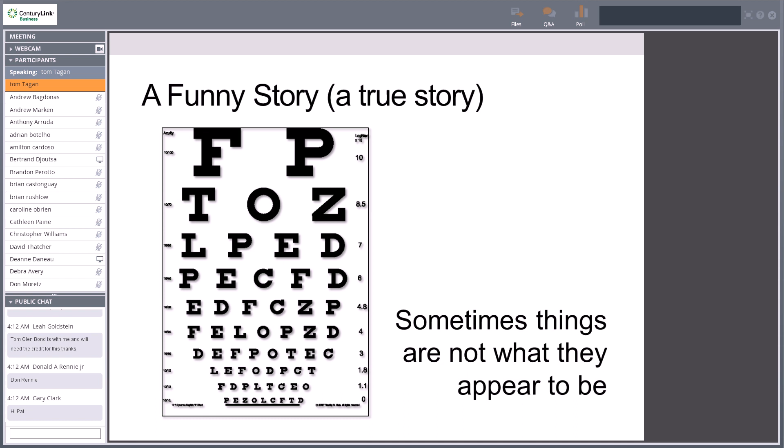Okay, Thomas Therian, absolutely right. And I know where you are, Tom. I know you. Tom's a friend of mine. Excellent, excellent. In fact, I'm not going to say where it is, but Tom is extremely familiar with this.

So, again, we're going to look at things that maybe you're not thinking of, and maybe you'll show me something that I'm not thinking of. It's definitely a group effort, and it's a team effort. Good job, Tom.

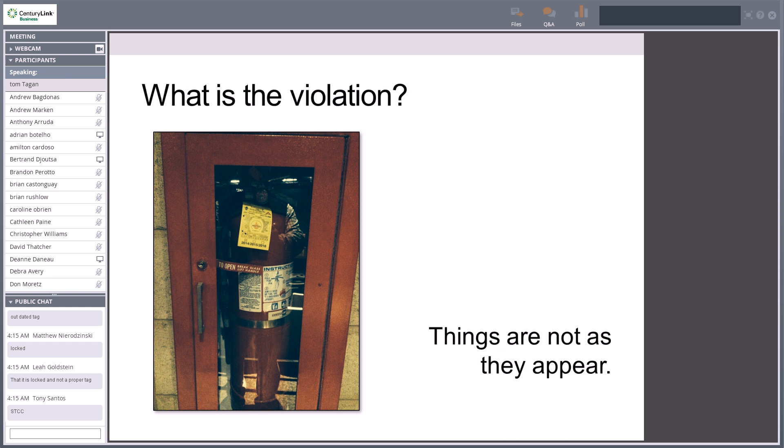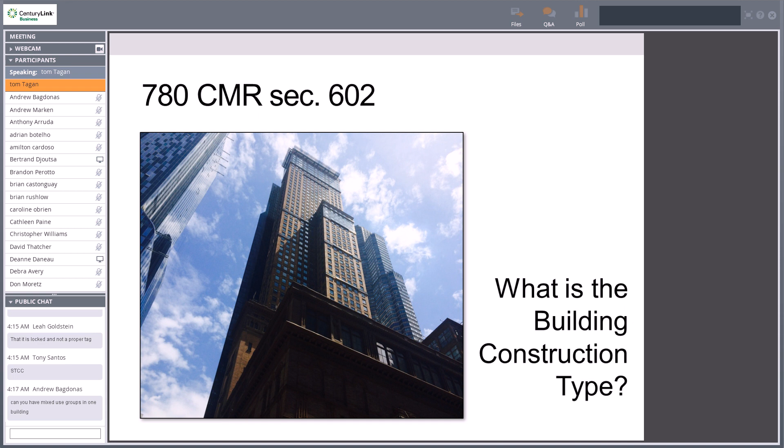Now, on buildings that are already built, I'm not here to reinvent the wheel. We're just going to make sure the exits work. A lot of times, though, I will get a question from the DCAM project managers saying, we want to remove this exit because such and such, and then I refer to Section 1021 and say, look, with the occupant load, with the use group, and the building type, I would need to have this, this, and this in order to actually let you take an exit out.

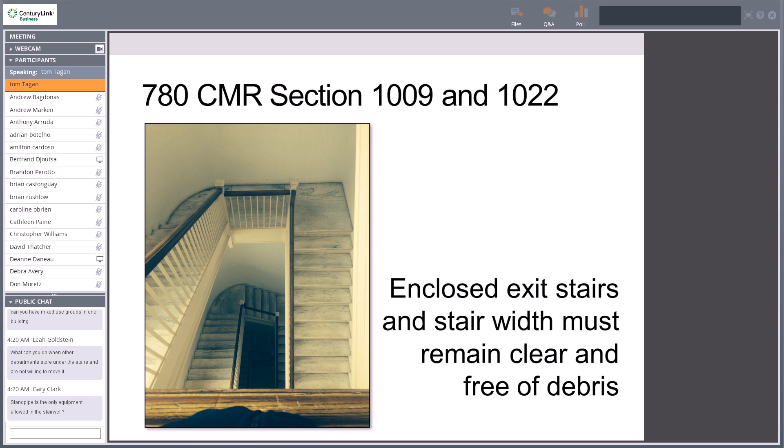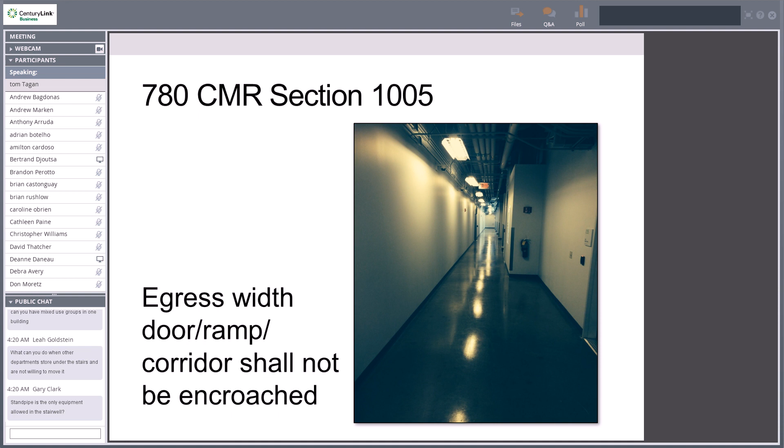I know this is illuminated in kind of a different way, but there's a backlight on the other side, so there's no issue with the illumination here. But we want to make sure they're illuminated properly, and that's one thing I look at. Again, when I'm doing the inspection, I always figure in the back of my head, the place is on fire, my hair's on fire, and there's 20 people in back of me. We can't choose our disasters.

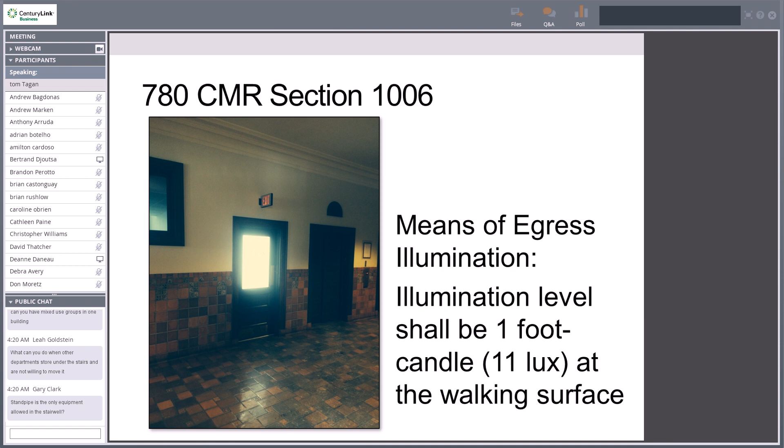So there's a lot of information that I'd like to get into, but with NFPA 110, I'm still going to always look for my emergency generator and standby generator systems. I'm looking for the testing from the company that does the work, and usually it's done either weekly, or the older ones are done by the month, and they're usually a printout. I look for that also.

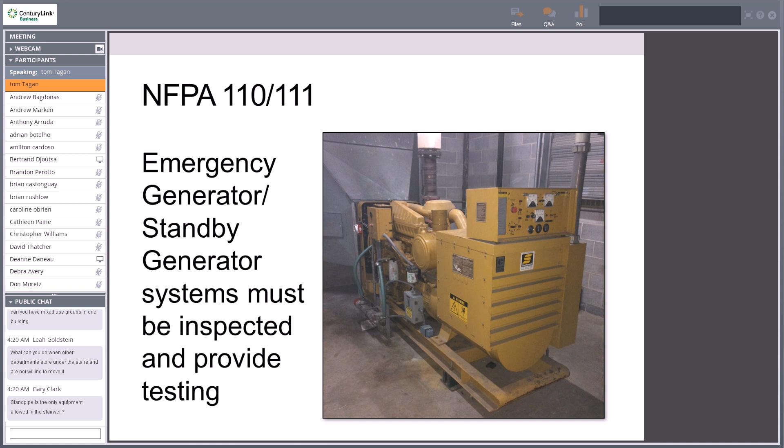Again, we're planning on doing a lot of trainings. I will be doing one on Chapter 7, starting from firewall and ending at smoke partitions and everything in between, and NFPA 80, which is the standard for your fire doors and rated doors.

So whenever I go into a boiler room, I'm always looking, and you guys should do the same thing. When you have work done and you have conduit drilled through a wall and you know it's a 2-hour wall, 1-hour wall, half-hour separation, whatever, make sure that there's a UL-rated assembly number, make sure that the assembly number is being put on, and make sure the rated assembly is actually being performed.

A lot of times we don't require a permit for minor electrical work, so you're our eyes and ears out there. The problem is when I do an annual inspection, I'll see that, I'll write it up, and we'll need to get that taken care of. But all of this stuff is there for a reason. And I'll tell you, I did a hospital, and this right here was in the building part of it. There was a 2-hour wall, and there were 3 areas that had holes put in after the building was built.

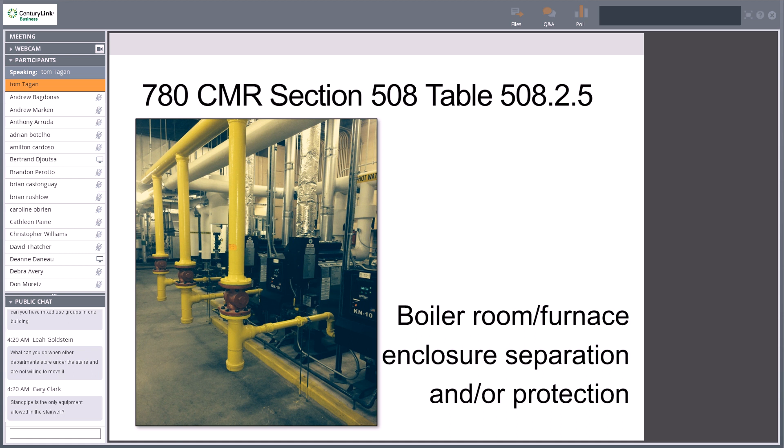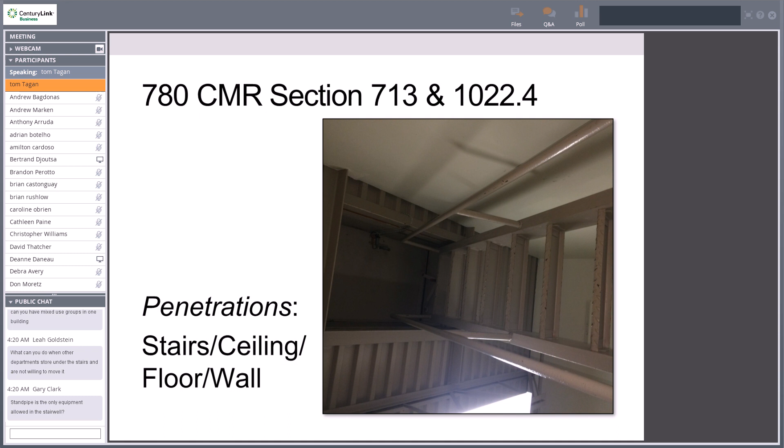Now, I'll tell you a story. We were doing a hospital in the central part of the state, and I was with the facilities director, and they had a bunch of beds all lined up. I said, I can't have these here. Every time I go over there. Finally I just put my foot down. I said, get rid of these things right now. So I went to lunch. I said, I'll give you till after lunch. So the facilities director comes over. He's all confused. He says, hey, I'm not trying to be a jerk, but I'm having pushback from the hospital. I said, oh, really? He says, yeah, the hospital guy told me to tell you. I think he thought I was from the city, not the state, that's why he talked this way.

He says, why don't you worry about running the building department, and he'll worry about running the hospital. I said, oh, okay, that's cool. I got a little message for him. He's absolutely right. I don't know that much about hospitals. One thing I know, though, if I don't sign the certificate, he doesn't have a hospital. And they seemed to move that relatively quickly, so that's a good thing.

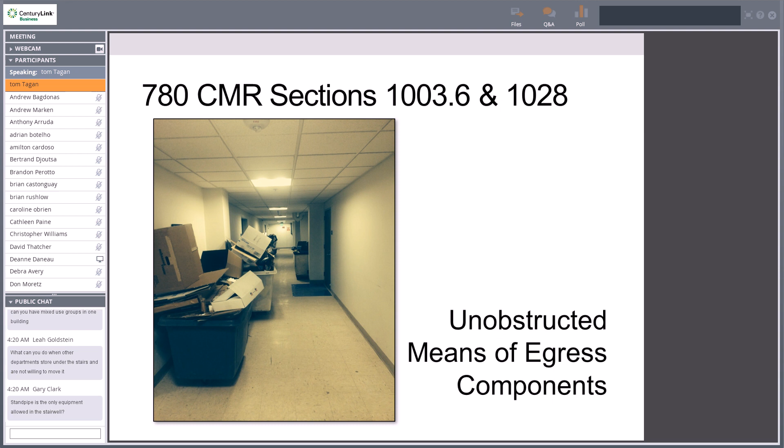We need the Jeopardy music. Yeah, we'll do that. Oh, no.

Marta, that's absolutely right. The first one, Marta put down exit discharge. Do we have another part? Someone listen to Marta.

No, these right here are ancillary, but I'm talking about the major components. Sign, door, and push bar - very good answers, direction's a good answer also, but nope. We need 2 more.

Door opening to the exit. There we go, Marta, excellent again. Exit, and then, nope, not the size - good answer though. Exit illumination is definitely, that's an accessory, but it's not a part. Three major components.

And the hallway is close. Dinah. Okay, I'll give it to you. Marta got the last two, I'm sorry.

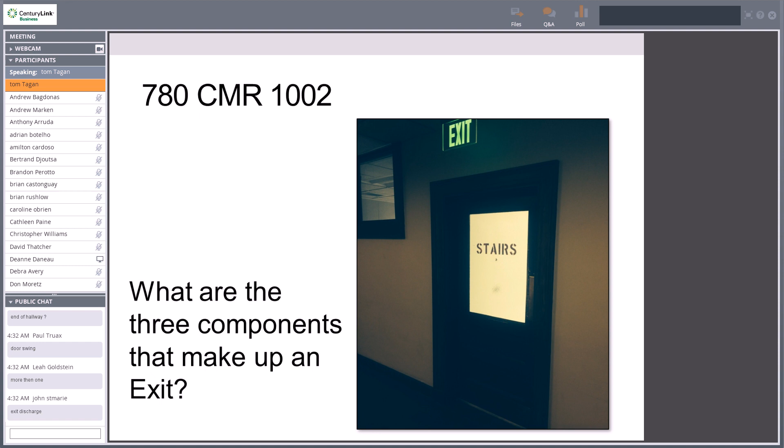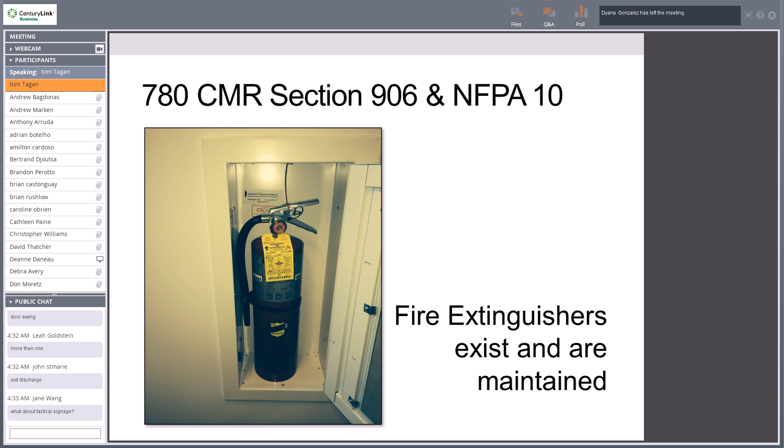Whenever you see a C, that's for anything with current, for electrical fires. A lot of fire extinguishers you'll see are A, B, C. And the K is for the kitchen. That's it. How's that for an answer? Excellent, thank you.

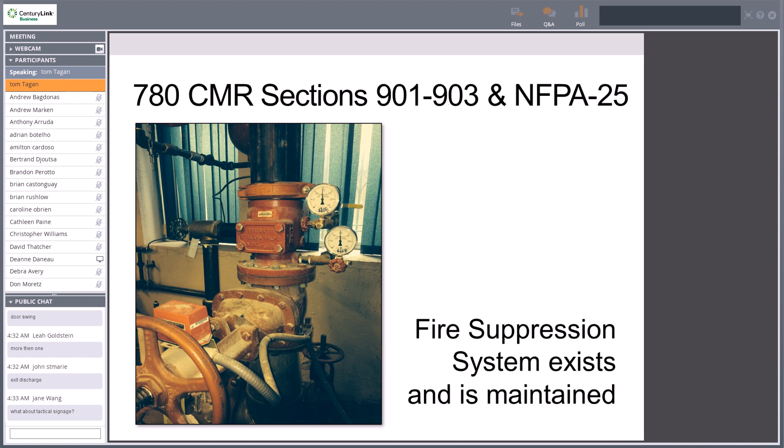780 CMR, again a 9. Remember, 9 is always fire suppression, alarms, and all that. NFPA 25 is anything having to do with water-based suppression systems.

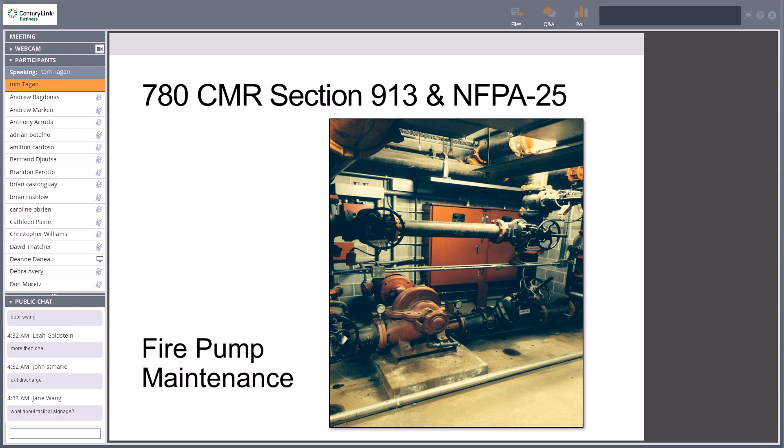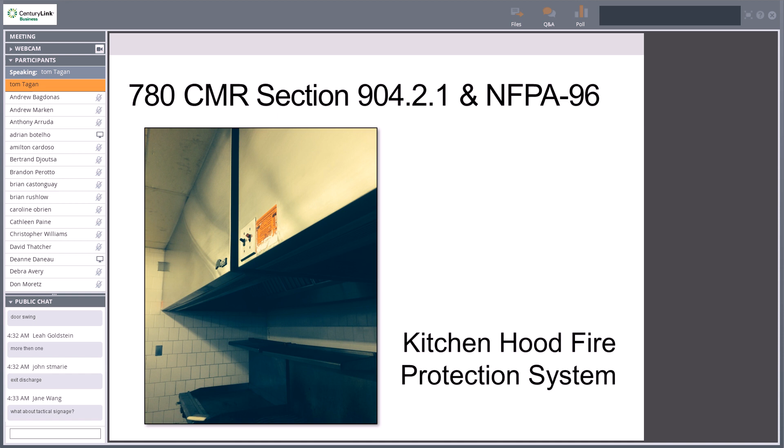780 CMR, 907 through 908. Again we're looking at the 9s. I know I'm repeating myself, but I figure you'll figure out that I'm trying to show you how the building code's set up. 9 is all the suppression systems, all the alarm systems, and NFPA 72.

NFPA 72 is an extremely informative standard. That covers all of your alarm systems, your electrical alarm systems. All the 7s in NFPA have to do with electrical. NFPA 70 is the NEC, the National Electrical Code.

Smoke, heat, horn, strobes present and maintained, report of testing is required. This is the first thing I ask when I go in, whoever's had the joy of having me as their inspector. I say, I want to see your NFPA 72 and your NFPA 25 inspection forms.

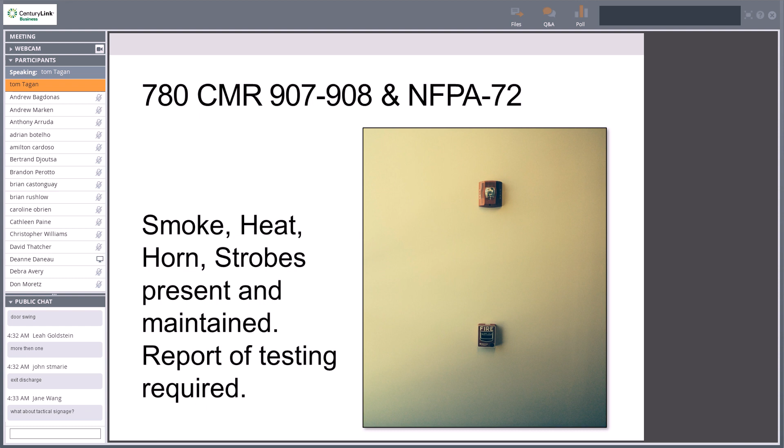Again, 9. Just remember, Chapter 9 is the suppression and alarm systems and all that. 780 CMR.

916, this right here is the MA amendments and NFPA 720. Notice they just added a 0 to 72. This is still a detection system. This 720 is part of 72, it's referred on to 720, and that's carbon monoxide detection maintained.

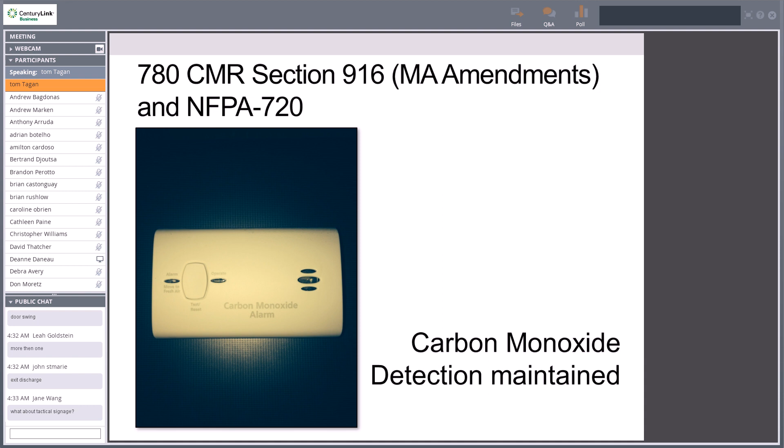Whenever you have anyone who goes to sleep, lives there, or any residential area or anything like that, we need to have carbon monoxide alarm systems.

780 CMR 7 - remember, this covers all the rated assemblies. 780 CMR 716.2, 716.3, 716.4, and table 716.3.2.1.

Fire and smoke dampers must be maintained, accessible, and identified. One of the larger issues I have - I put quite a few of these accessible panels in. You'll also be working with the state sheet metal inspector for these. It's kind of a joint jurisdictional thing we do here.

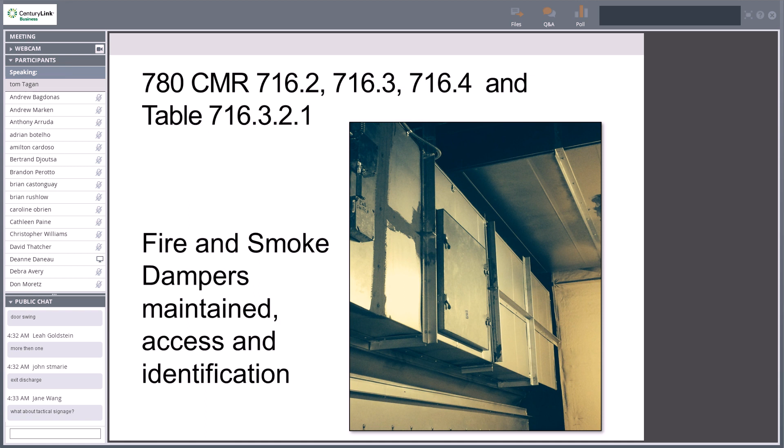780 CMR 9 - detection systems, and NFPA 72, alarms. Manual pull stations must be present and maintained. A report of testing is required. Your alarm system inspector, or maintenance contractor, should be giving you a report on all of this.

Can I ask another question? So in some hospitals they don't have the manual pull stations because they don't want patients pulling them - sometimes they have a key system instead. Is there something you look for when they have something like that?

In 780 CMR 907 and NFPA 72, we do have exemptions for these. If they're present, that's why I say 'if they're present' - they must be maintained and required to test. On some issues, some occupancies - and that's why we need to know what the use group is and what the building type is - some occupancies, I1, I2, A3, do have exemptions for having the manual pull station, because sometimes it's more of a hindrance than it is a life safety piece of equipment. Thank you. No problem.

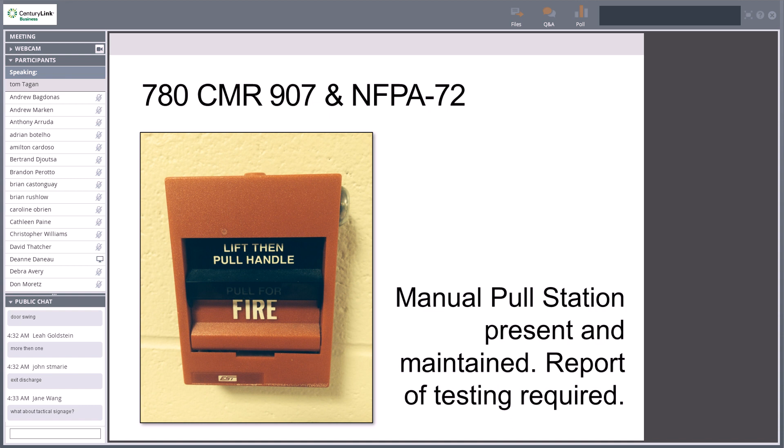780 CMR, again, 10 - what was 10 again? That's a question, what is 10 denoting? I've said it 10, 20 times already. What is the 10? You can use your egress - that's all I see is egress. Excellent job, I know you guys are listening.

Gals are listening. All right, 780 CMR 1012 and 1013. Handrails and guards must be maintained. You know how many times I walk onto a set of stairs and the first thing I do is grab on? I know I'm a little pixie, I don't take a lot of weight, but I pull on them for a reason. I'm going up staircases and through various places that have to be protected - I'm pushing on them and this, that, and the other thing. The reason being, I want to make sure those are not going to fall off or be out of compliance.

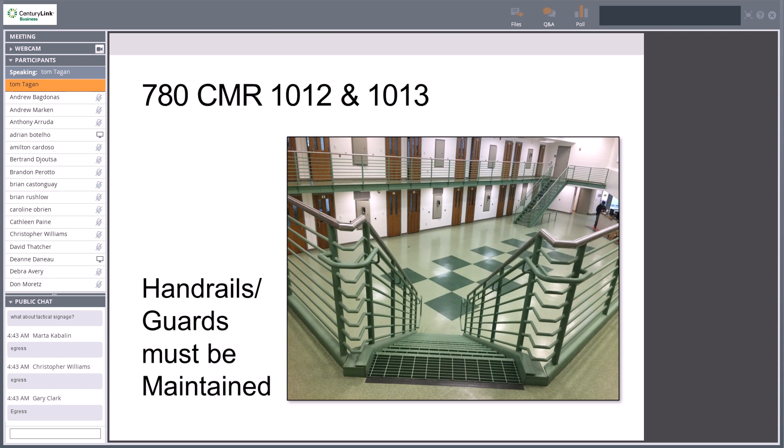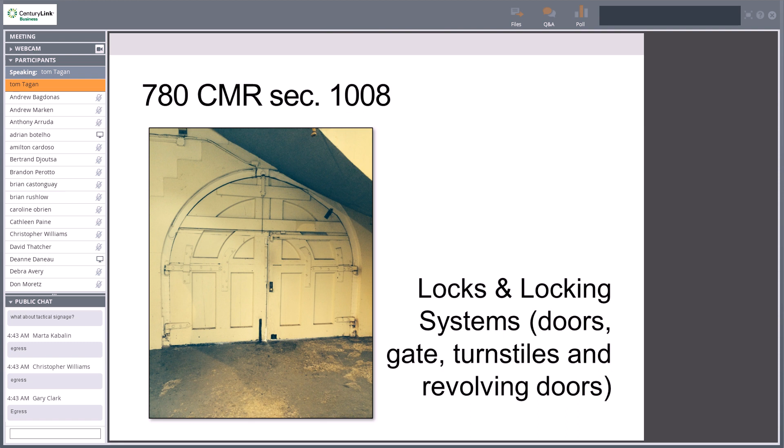Excellent job with the egress, thank you very much, I'm glad you guys are listening. 780 CMR, again 10 - locks and locking systems, doors, gates, turnstiles, and revolving doors all have to be maintained. This right here is a very unique door, at STCC campus - this is actually the museum run by the National Park Service. Sorry about the picture, it's sideways, that's the way it goes.

780 CMR, section 10 again - 1008.1.10, panic hardware, fire exit hardware, use group A and E. Now when we get into NFPA 80, which we're going to have a seminar on, you're going to find out that not all panic hardware is born equal - there's certain stuff for certain doors.

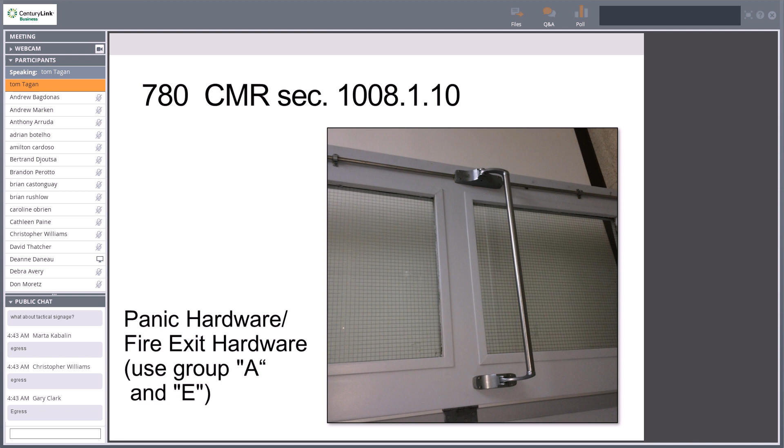This building - the question was from Tom Therrien, who's right down the street, so Tom, you can go look at it and let him know. All I got to say is we talked to Harold, and he said we don't need one because it's a historically significant building - you can see a light up here, but the exit would take away from the historic value of the building. It's very rare we ever grant this, I'm just messing with you Tom, but under chapter 11 of the International Existing Building Code, we do have different means for exit discharge in a historic building. So there are a couple exemptions here - it is what it is. Good job, Tom, thanks for giving me a hard time.

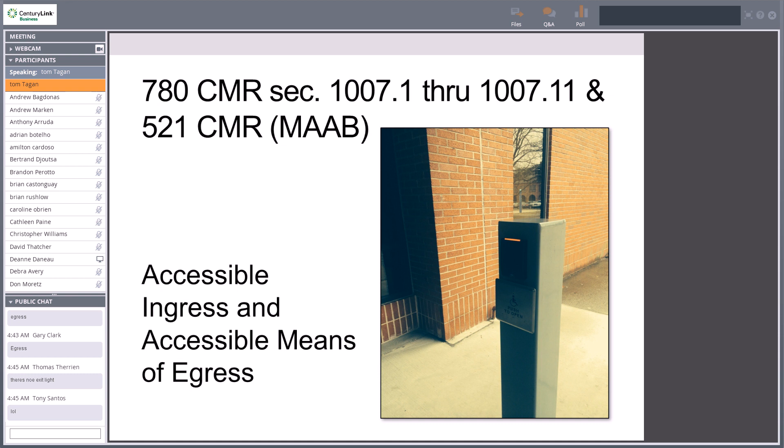780 CMR, 1001.3.3, Mass amendments. Exterior stair fire escapes every 5 years. Fire escapes and egress balconies shall be examined and/or tested and certified for structural adequacy and safety every 5 years by a Massachusetts registered professional engineer. If you keep on reading, they give you a couple exceptions of who could be looking at that, but I like seeing a Massachusetts registered engineer. It will say, pretty much, a person who is competent in the building and maintaining of fire egress, balconies, and fire escapes. I have not found that person yet.

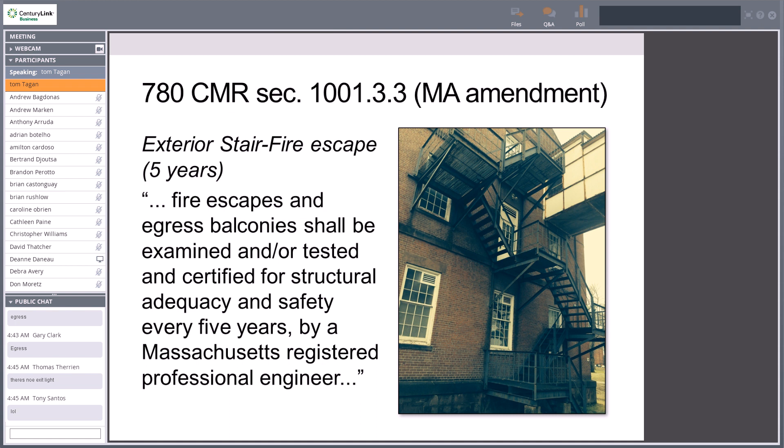780 CMR, Chapter 4. Now, 780 CMR Chapter 4 is kind of an odd chapter. Chapter 4 is funky people doing funky things. That's the easiest way to put it. It's paint booths. It's aircraft towers. It's anything that wouldn't fit anywhere else. It's covered mall buildings, anchor stores, and all that. And it's stages and proscenium curtains. Anything they couldn't put anywhere else, they threw in Chapter 4.

So Section 410.3.5, proscenium curtains, stages, and platforms. The stage opening shall be provided with a fire curtain complying with NFPA 80. Now, whenever we talk about NFPA 80, just think of all of your rated doors, rated openings, and we're going to have a class on that. NFPA 80 goes hand in hand with Chapter 7, which is rated assemblies, and/or an approved water curtain complying with 780 CMR Section 9.

Now, you're going to see 780 Section 9. The water curtain is actually part of the sprinkler system, which brings you to Chapter 9, which is all your suppression and all that stuff. There will also be an alarm component there that will go to the rest of the suppression system and the alarm initiating devices.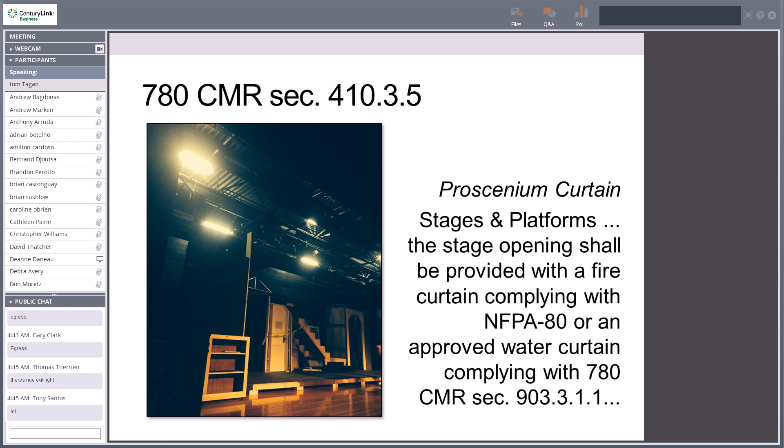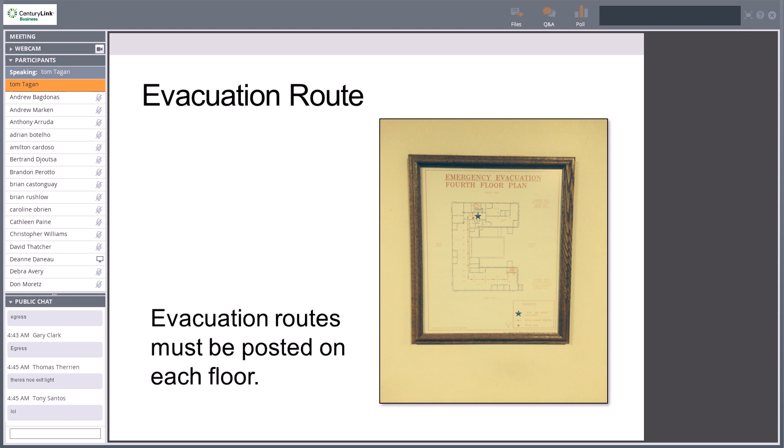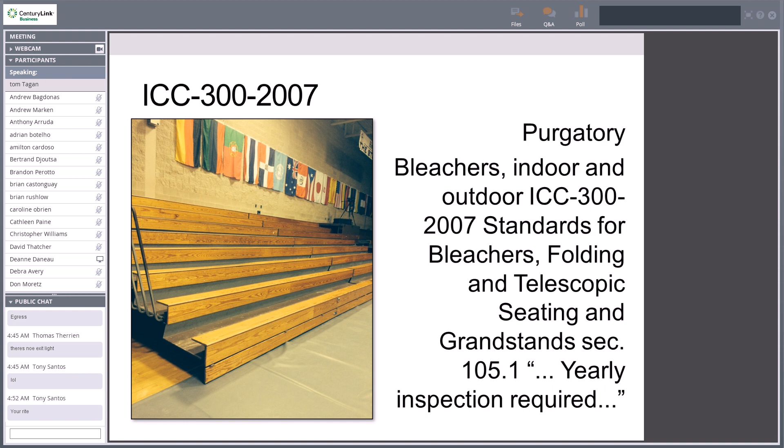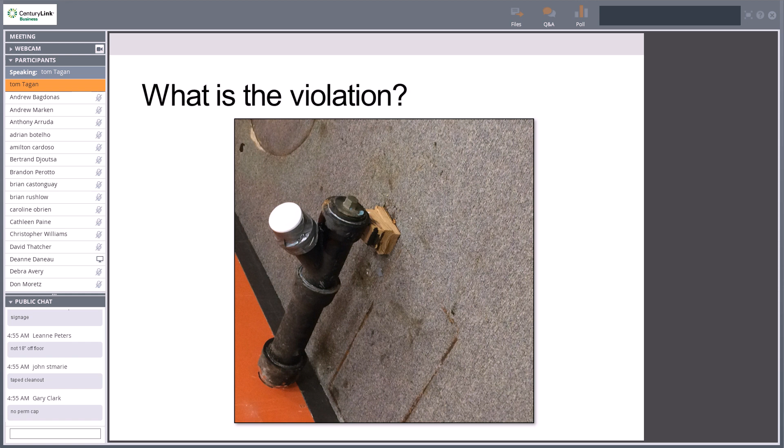So when we flush the toilet and say it didn't go down all the way, I have a feeling the pressure's going to come here, and then through here, and it's going to fill the whole cabinet up. And I hate to be the person picking up the cabinet. Anyway, that has been repaired, but I just thought it was interesting that even in our buildings we find crazy stuff. So it is what it is.